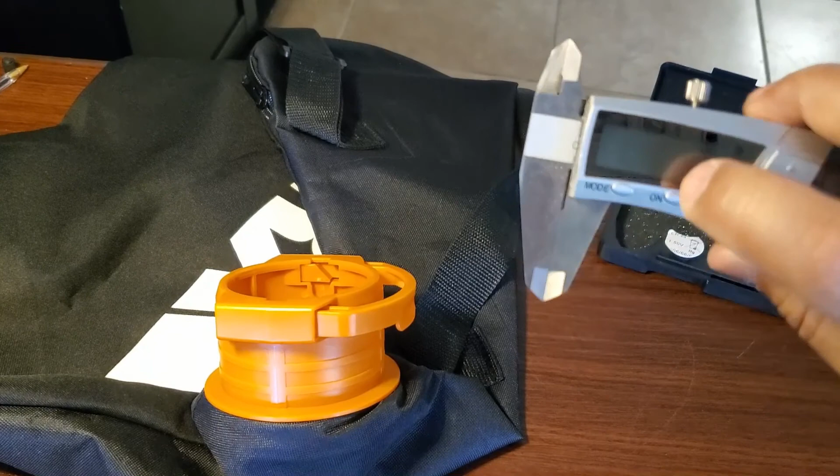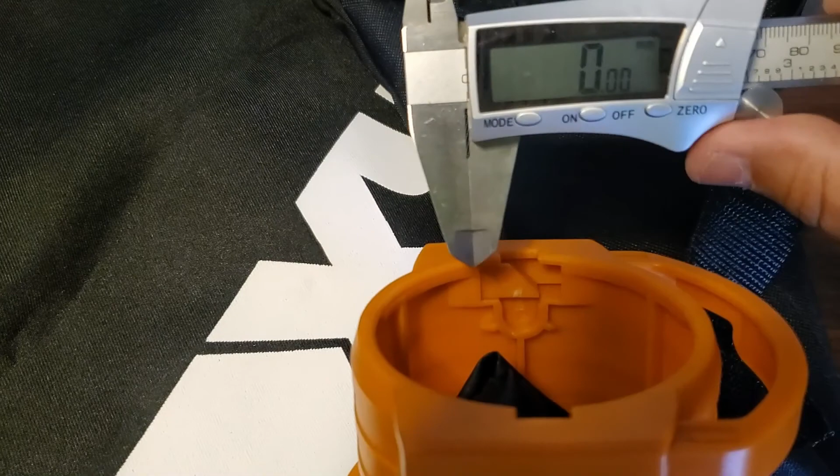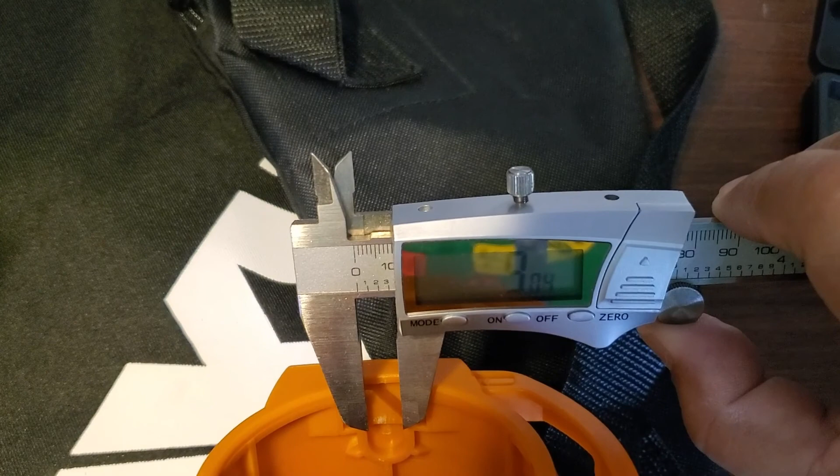Next step, take measurements. I've got my digital caliper here. I'll calibrate it to zero. This side here is about a 10.

I'm just going to take the measurements real quick off camera, and I'll be right back.

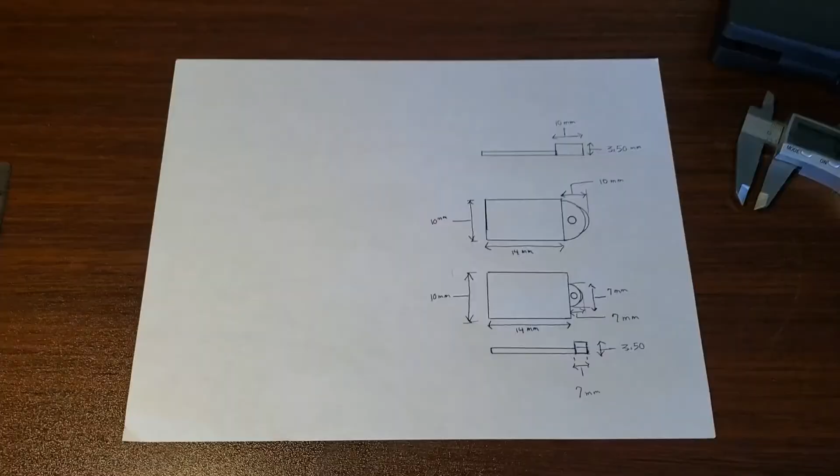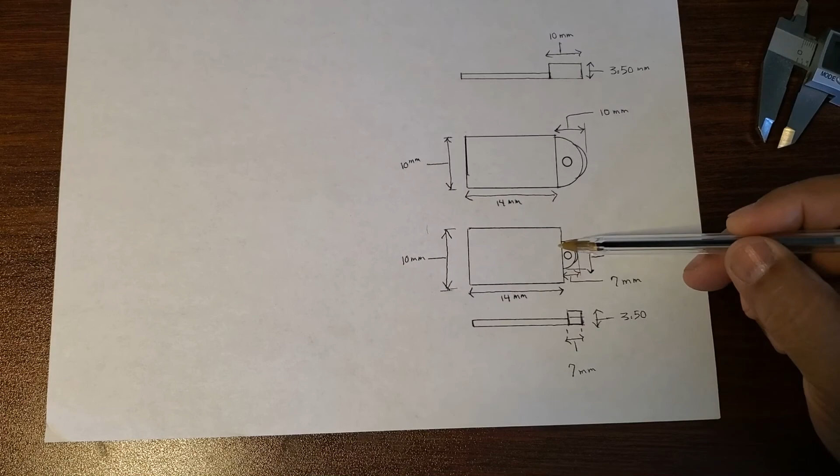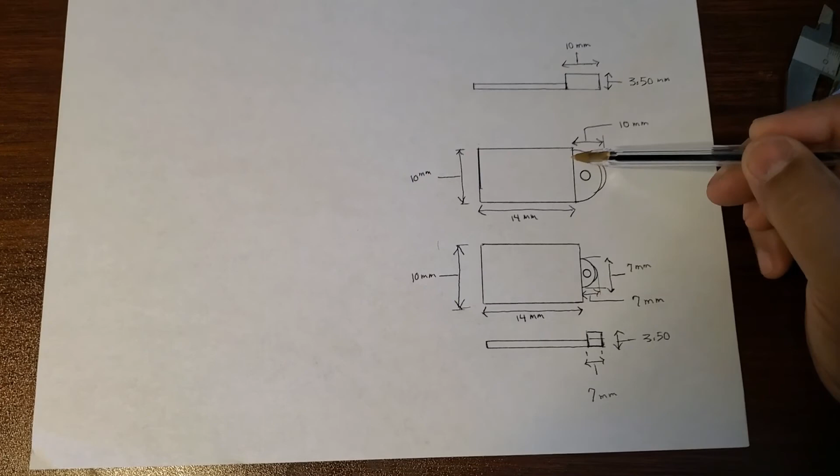Okay, here I have it. I took the measurements off camera, and as you can see, it's a total of 14 millimeters longwise, 10 millimeters width. The smallest part is about 7 by 7 millimeters wide and long, and that's 3.5 millimeters tall, same as this one. It's got 10 millimeters by 10, and that's basically what I'm going to be using - this area right here and this right here. That might get clipped off, I'm not sure.

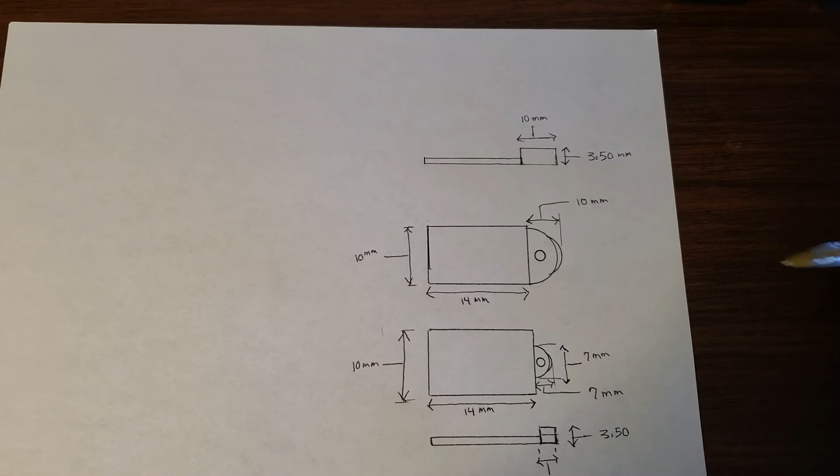But that's the basic schematics for the pieces I'm going to 3D print. Next step is to create those in a 3D printing design CAD tool. I'm going to use Tinkercad, which is free software you can use online. So bear with me, and here we go.

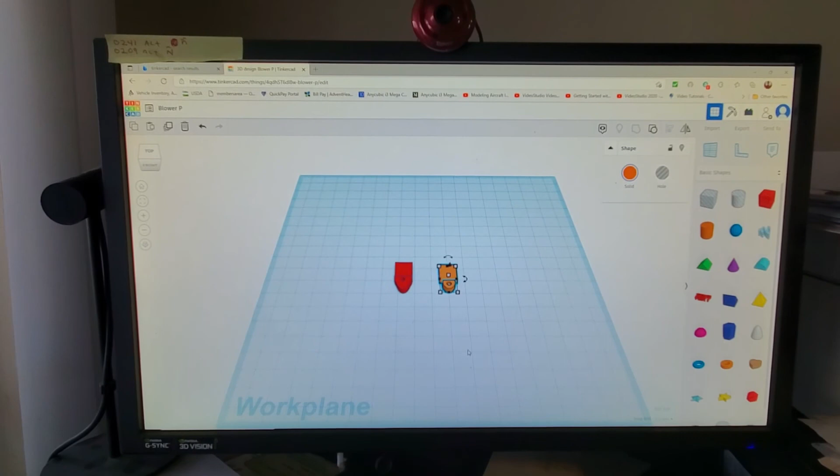Here we have Tinkercad, the 3D model creation tool - you can basically create anything and print it with a 3D printer. I made some arrangements here, took the measurements off the paper, and just put this there. Export. Now I have it here.

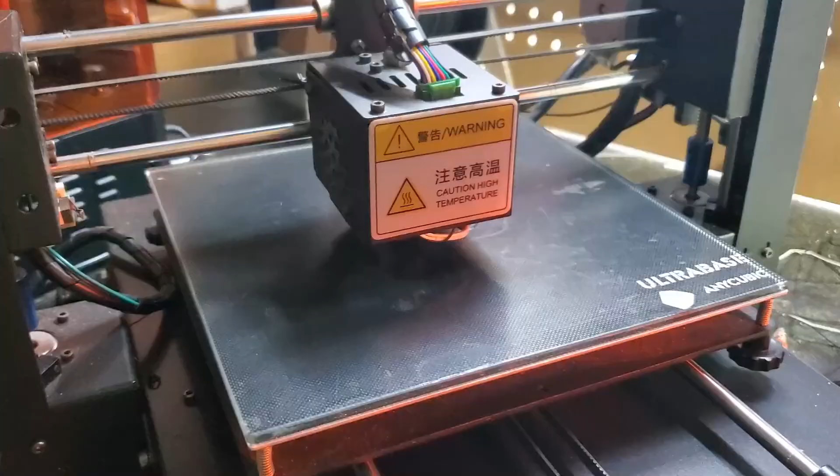Printing process has started. You see right there, it's just making the outline of the parts, and shortly we'll be back with the finished parts. Okay, the parts are done.

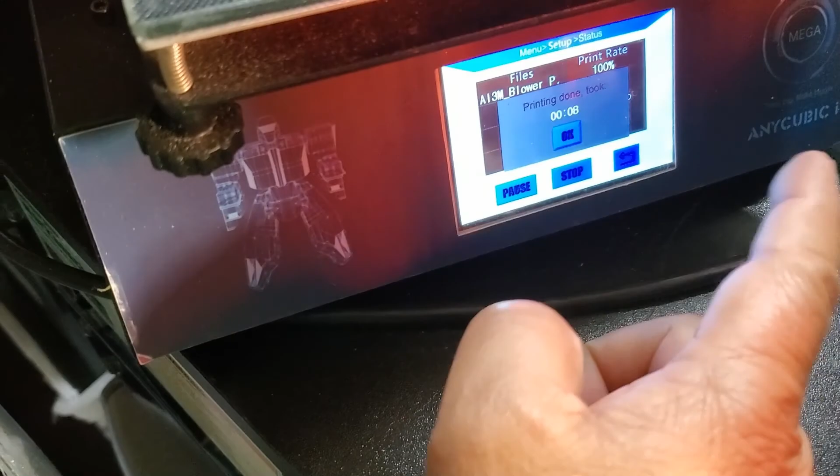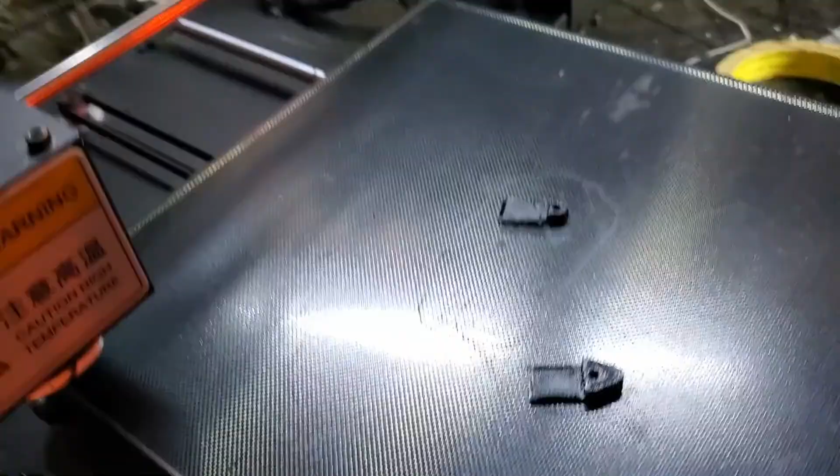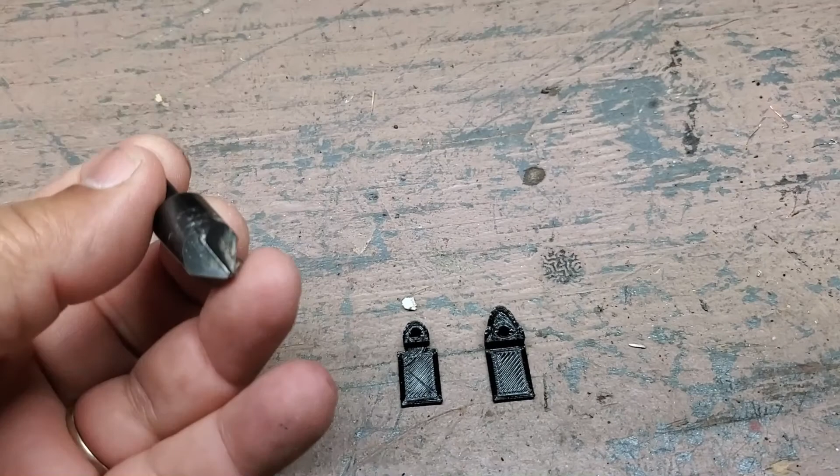Next step, I'm going to be using this tool to make this hole a little bigger on the top, so I can put a screw in there. It's going to sit flush - we don't want that screw protruding outwards.

Once that's done, we'll put these on the actual part, drill a hole, and go from there. I inserted the small piece in right there, and do the same thing with the bigger piece. All I did was let it slide in and just sit.

Now the next step is I'm going to take super glue, put a little bit right there, a little bit right here, and then slide the piece in. What that's going to do is allow a temporary bond to where exactly these pieces are going to go on this area, so I'm able to drill the holes so it's perfect.

Alright, I don't know if you can barely see it, but right there you can see the black part of that piece protruding out. Same thing on the other side. I'm just going to wait for that to dry out, and go from there.

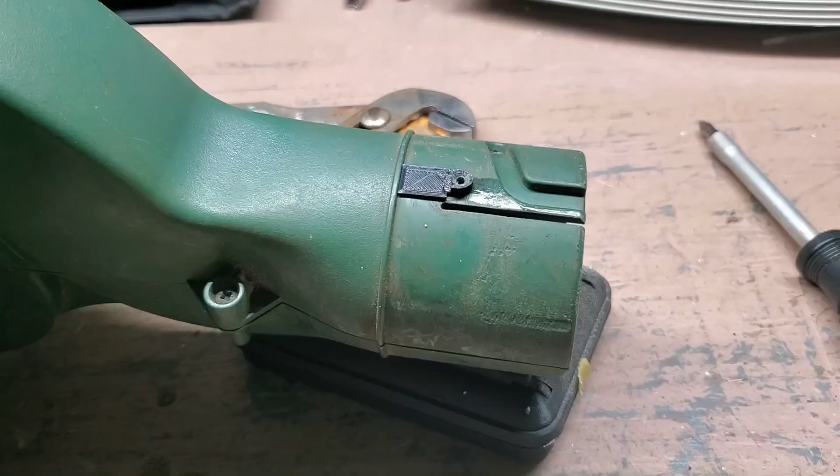So here you have it - the piece is glued on. I'm going to make the hole in there so I can put a screw. I'm going to use these screws to hold those pieces together, to hold this to the frame. I'm going to drill the holes and screw those screws in.

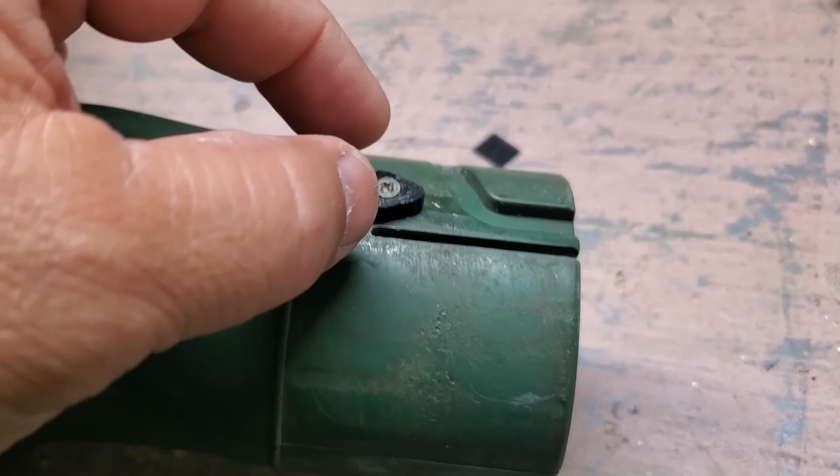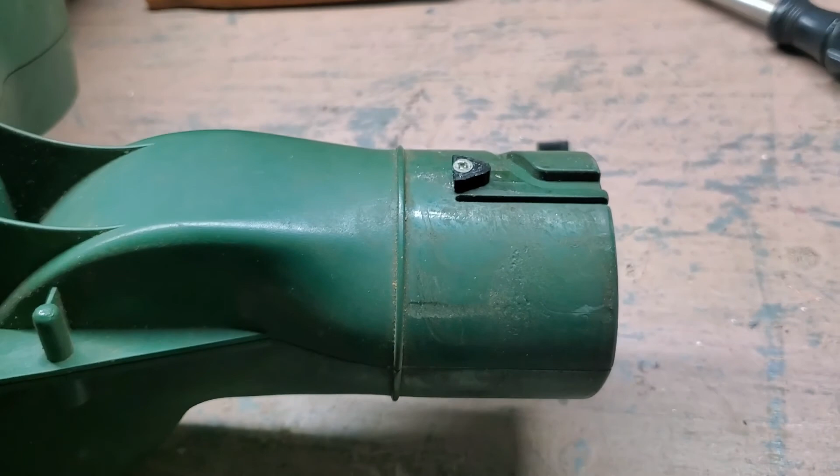When I was drilling this one and did the countersink, unfortunately this part broke off, but that's fine because all I really need is this part that holds it in. That's why it's got the flat part on this side, so it holds that piece in. This is okay - I might snap off the other side's flange as well, I'm not sure. I'm just going to test it real quick and see how this works. I'm going to set up my rig off camera, and then I'll be right back.

Okay, I have this all put together. Got the bag, got the pieces I installed, both sides. So let's see if this works.

There you have it, it's been hacked. Release. Not bad, it goes smoothly. Do it again. Awesome, now for the test run.

Okay, it's all hooked up, so let's see if my hack works.